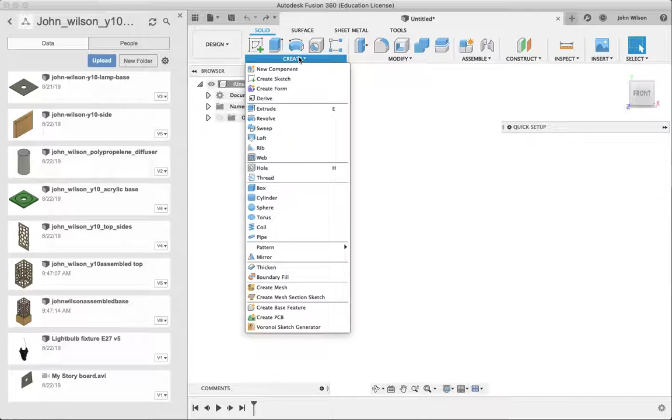Once we've opened it from your download folder and closed and reopened Fusion, we should be able to start using it. So come into solids at the top, go into the create menu, and hopefully right down at the bottom there's the voronoi sketch generator.

When you select that, you're going to get a dialog box like this pop up. So for number of cells, I'd be a bit cautious here. It says you can go up to 256, but I wouldn't suggest anything remotely like that.

I'm going to go an odd number, I think 17 will work for me. 17, 21, I don't know, keep it towards the lower end of that. This one here I haven't fully worked out - it does change it, but I haven't fully worked out how. Sorry, I missed this one entirely.

This is curved or straight sides, and it's as simple as that. One is going to give you curved shapes, one is going to give you straight edge shapes. I'm going to go curved.

This is super important - the width needs to be 102, because that has got to fit the base that you've already created. If it's not 102, it's almost certainly not going to fit.

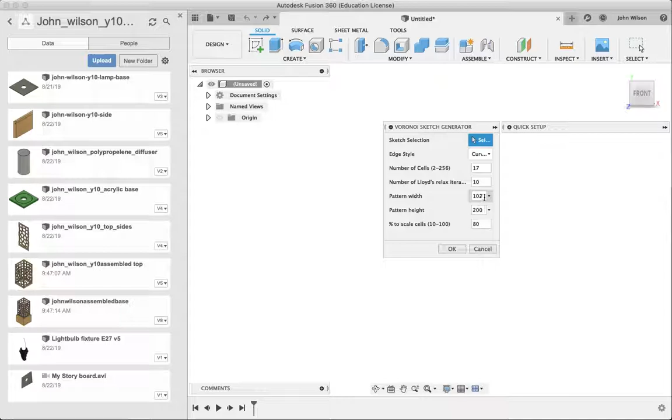Okay, so curved edges I've gone for, could have chosen straight. Number of cells, odd numbers seem to work quite well, don't make it too large. 102 must be the width, 200 must be the height, and then I'm going to click OK, and it's going to draw that for me.

Okay, so that's pretty cool because I've got nice curved edges to everything, and that's going to be the basis for my side piece.

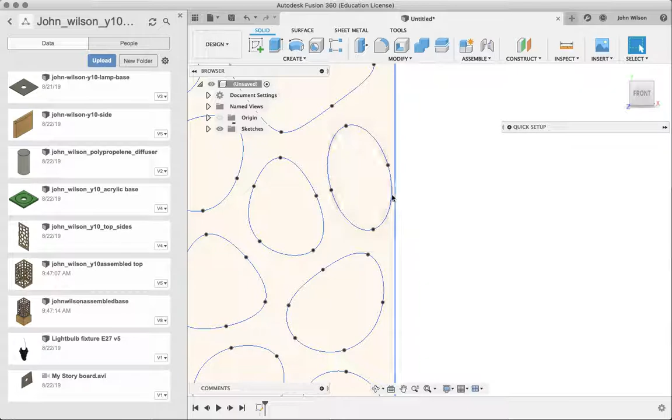Now once you've done that, you can see some of these come really, really close to the edge. That's never going to work. Think about laser cutting and how thick the material will be that's left there - it's going to be pretty small, right? There's a few places like that, that's the worst one obviously.

That's pretty close, and we've also got to put some joints into this, so you'd really be struggling to create that. So what we're going to do is I'm going to edit this sketch.

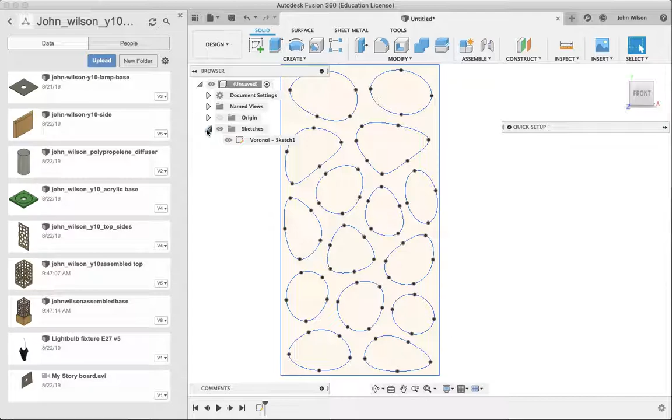To do that, I'm going to click on this arrow here and edit my voronoi sketch one. Okay, so I'm now into edit mode with this. Once I'm in edit mode, I'm going to do what's called an offset - that just involves pressing O for offset on your keyboard and then coming to an edge.

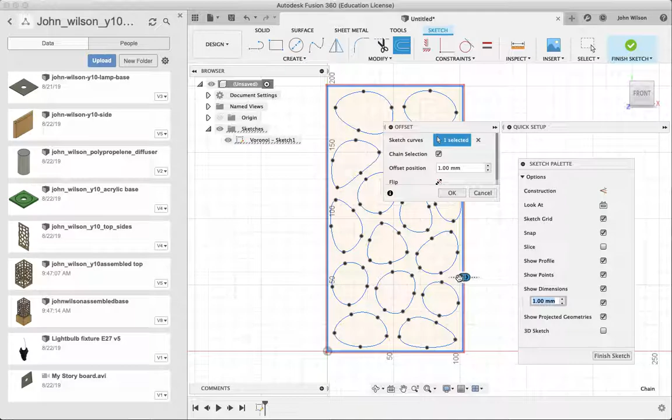If I click on here, it's going to give me an offset of that shape. I want an offset of the rectangle. You can see it going blue to pre-highlight it. Click on there, and then I'm going to drag that in, but I actually want an amount, so I'm going to put in -10, and that's going to give me a 10mm border all the way around the outside.

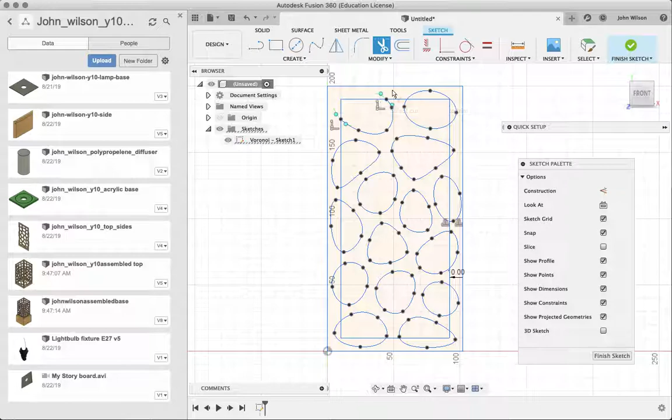Once I've done that, I'm just going to delete anything that's in the border. So I'm going to press T for trim, and I'm going to delete out anything that is too close to the edges. So now I know that everywhere I've got 10mm of material once I've laser cut.

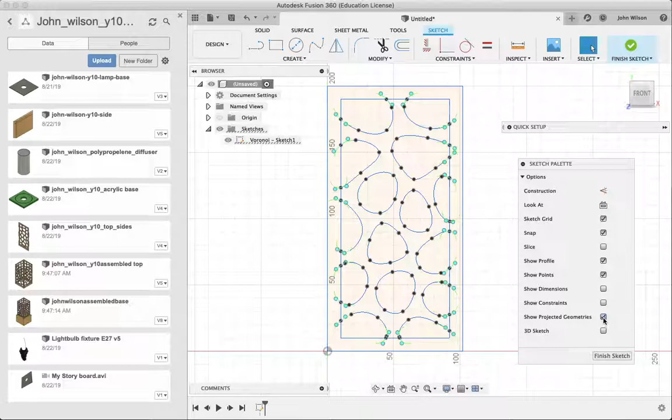Now all of these lines and marks might be a bit distracting for you. If that's the case, just come over to the side and start unticking some of these things. So you say, I don't want to show the dimensions, I don't want to show the constraints, I don't want to show the projected geometry, I don't want to show the points, and so on.

And you can see that's going to start clearing that up. I leave the profile on because that gives you a good indication of whether things are right, I think it helps, but up to you.

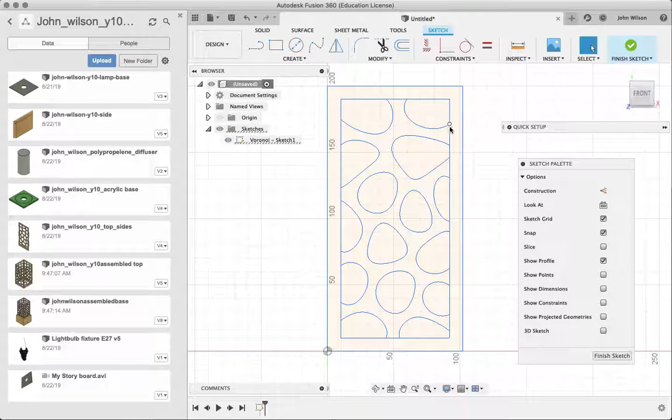Now, if I send that to the laser cutter, every one of these continuous lines is going to get laser cut. And if they all get laser cut, then obviously all of this is just going to fall out - it's just going to come out as a separate piece, which is not what I want.

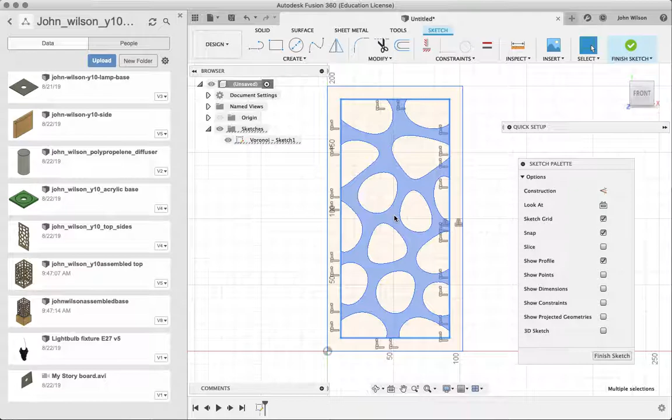So I'm going to use that same trim tool that I just used to get rid of everything in the border, except this time I'm going to trim these pieces because I want my overall shape to be connected to the edges. All right, so I'm going to take those out, and then if you look at what we've got, I think that's it, isn't it?

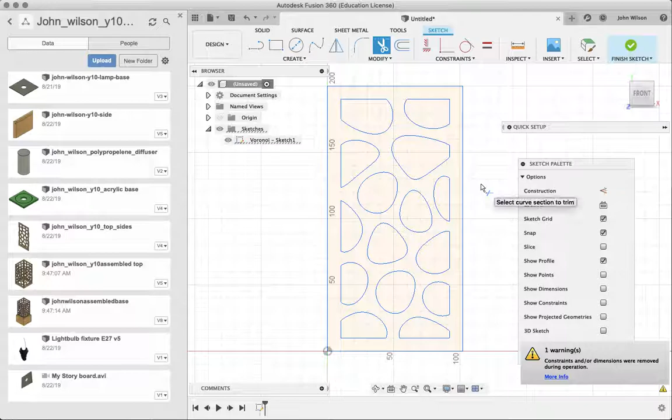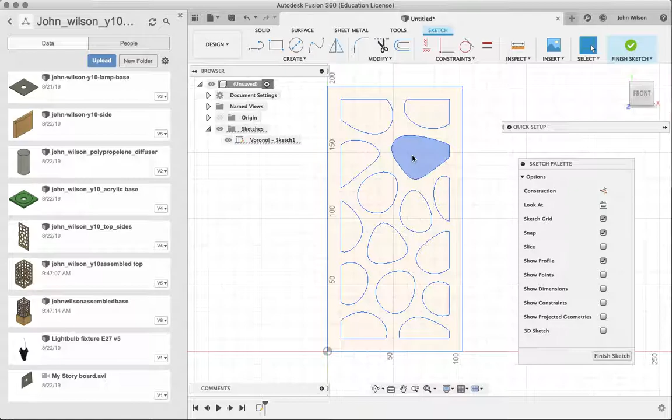Okay, so that's how to do the pattern. And I'm now going to save this - I should have done that at the start. I'm not being very good here because I'm always telling you save at the start, which I didn't do.

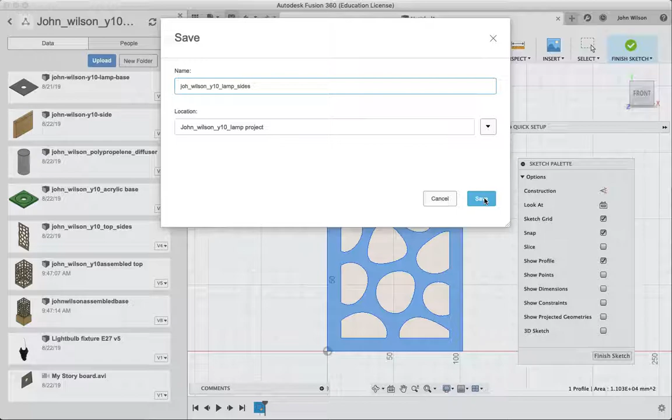And in the next tutorial, I'm just going to show you how to make the little connections on the edges, so that when we print 4 of these out, they're all going to join together.